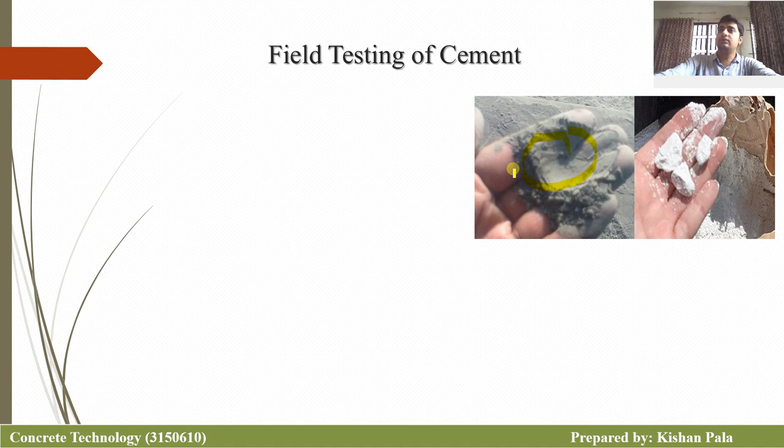So the first step is to identify the color of the cement. You can see in the first picture, you have to identify the color of the cement. It should be a greenish gray color. Second step, the cement should be free from lumps. So you can see in the second picture, the white cement has lumps.

And the third step is when the hand is inserted in your cement bag, it should give a cool feeling. It means if you are inserting your hand in your cement bag, you should get a cool feeling. This is the indication of fresh cement. Take a pinch of the cement and feel it between the fingers. It should be a smooth feeling and not a gritty feeling. So this is the indication of fresh cement.

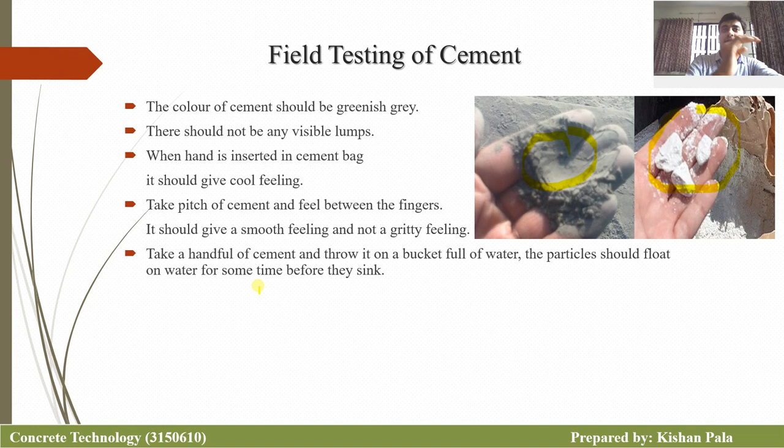Take a handful of cement and throw it in a bucket full of water. The particles should float on the water for some time before they sink. So this is also the indication of fresh cement. And you can test this at your field for the cement.

Take 100 grams of cement and add some water to make a stiff paste, and from the stiff paste make a cake, put it on a glass plate and slowly take it underwater in the bucket. The shape of the cake should not be disturbed while taking it down to the bottom of the bucket. After 24 hours, the cake should retain its original shape.

Remember that after 24 hours, the cake should retain its original shape. And at that time, it should also set and gain some strength. This is the indication of fresh cement. So these are the few steps you can apply at your site for field testing of cement.

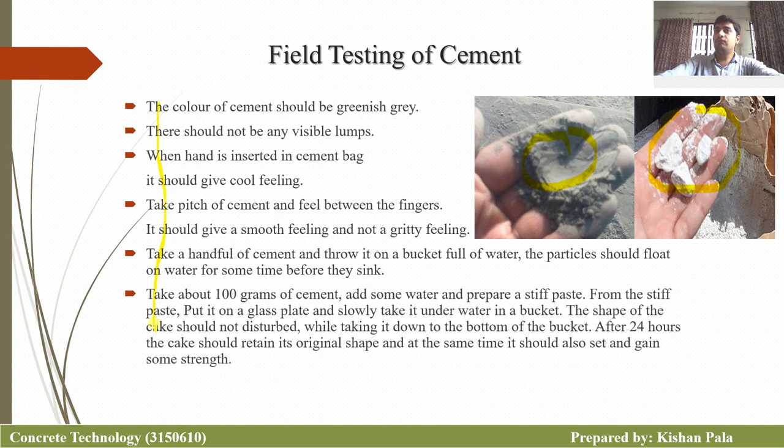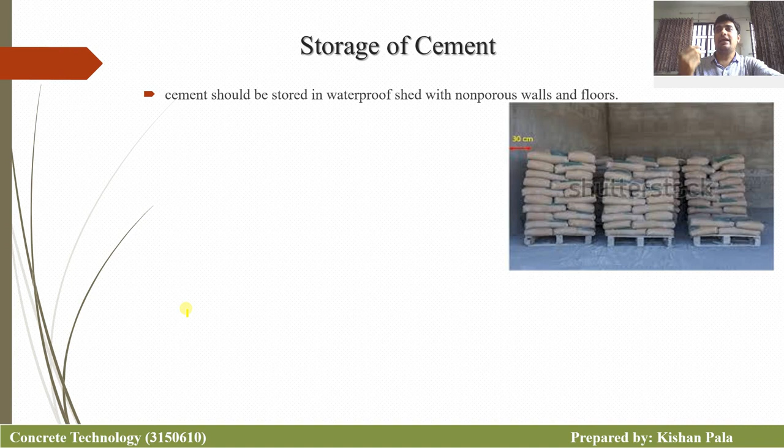Next, storage of cement. This is also an important point. You should be careful about storing cement. First, the cement should be stored in a waterproof shed with non-porous walls and floors. Second, the plinth level should be above the ground level. You can see in the photo, the cement is placed above the ground level.

Third, the number of openings and doors should be minimum in your storage room. You can see in this photo, there is no ventilation or windows in this storage room. Drainage should be provided if necessary. Next, cement bags should be kept 30 centimeters away from the wall.

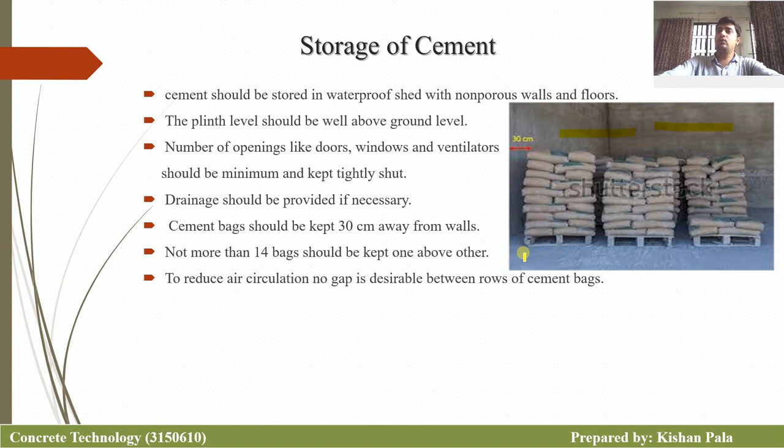No more than 14 bags should be kept one above the other. It means if you are placing the cement in one column, there should not be more than 14 bags in one column. Next, to reduce air circulation, no gap is desirable between the rows of cement bags. In a moist area, the cement bags should be placed on wooden planks kept above the floor or ground level. And old bags should be used first.

Remember, first in, first out. It means old cement bags should be used first. So remember this: first in, first out. It means old bags should be used first. And particularly for beam and slab casting, use fresh bags only. Once the cement has been properly stored, it should not be disturbed until it is to be used. So these are the points you should keep in mind when storing cement.

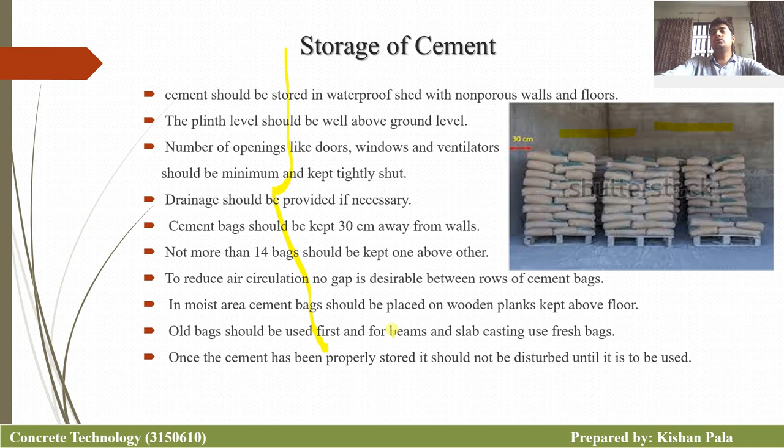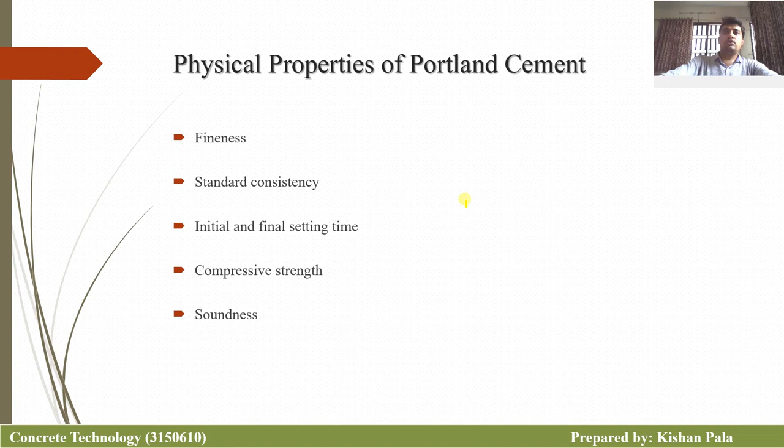Physical properties of Portland cement. There are a few tests you have to perform for finding the physical properties of cement. There are 5 tests. First is the fineness test. Second is standard consistency. Third is the initial and final setting time. Fourth and fifth, compressive strength and soundness of cement. So these are the 5 tests you should perform for finding the properties of cement.

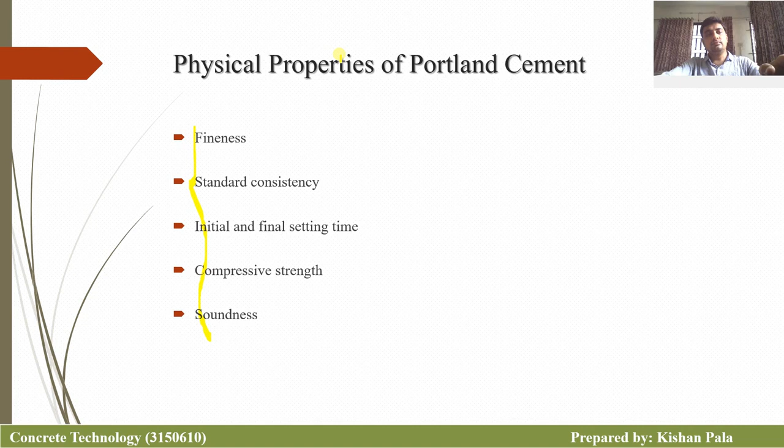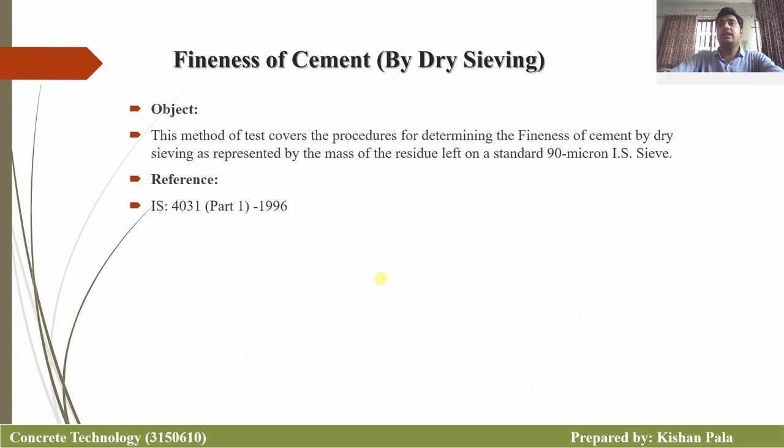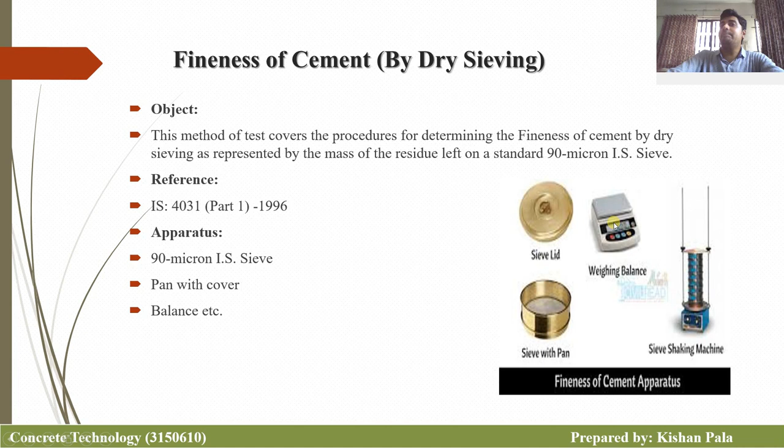Physical properties of cement: fineness of cement by dry sieving. Object: this method of test covers the procedure for determining the fineness of cement by dry sieving, as represented by the mass of residue left on the 90 micron IS sieve. You can refer to IS 4031 Part 1, 1996. The apparatus used for finding the fineness of cement are a 90 micron IS sieve with pan, a balance and a sieve shaker machine.

Let's understand the procedure for finding the fineness of the cement. You have to take accurately 100 grams of the cement and place it on a standard 90 micron IS sieve, and break down any air-set lumps in your sample, so remove them with your finger, and continuously sieve the sample in circular and vertical

motion for 15 minutes and weigh the residue left on the IS sieve. As per the Indian standard, it should not be more than 10% residue for ordinary Portland cement and it should not be more than 5% residue for rapid hardening cement.

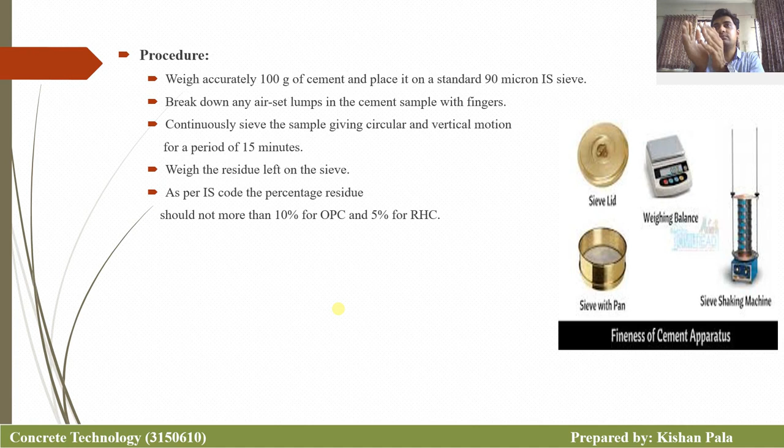I repeat this procedure once again. You have to take a 100 gram sample of the cement, put it on the 90 micron IS sieve, then shake it for 15 minutes in circular and vertical motion, and then take the residue on your IS sieve. It should not be more than 10% for ordinary Portland cement and 5% for rapid hardening cement. So this is the simple procedure. With this procedure you can get the fineness of the cement.

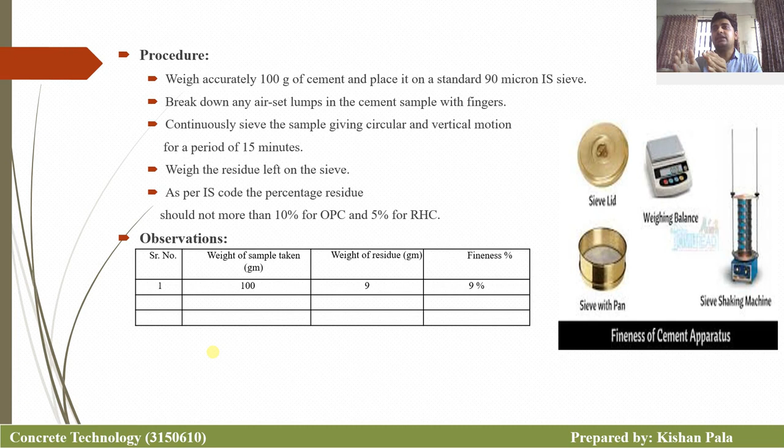For example, in the observation table, I have taken 100 grams of the cement and after 15 minutes of shaking, I got 9 grams of residue. It means 9 divided by 100 multiplied by 100, which is 9% fineness of the cement. If you have 100 grams of sample and after 15 minutes you get 8 grams of residue, it means 8 divided by 100 multiplied by 100, which is 8% fineness of the cement.

Remember that this value should not be greater than 10% for ordinary Portland cement and should not be greater than 5% for rapid hardening Portland cement. This is the simple procedure for finding the fineness of the cement.

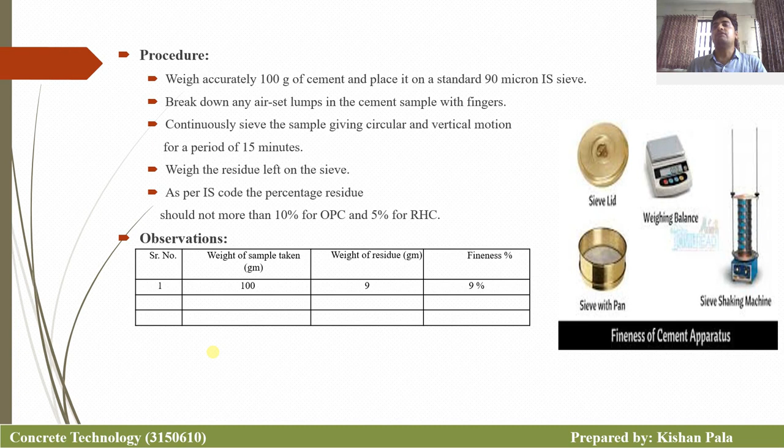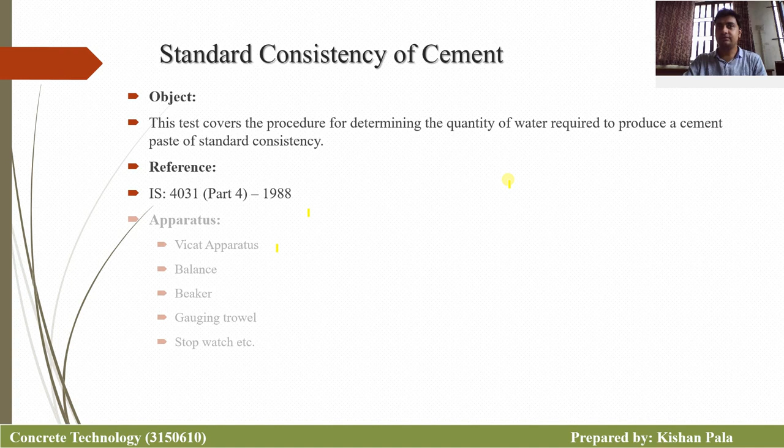Consistency of cement. Object: this test covers the procedure of determining the quantity of water required to produce a cement paste of standard consistency. You can refer to Indian Standard 4031 Part 4, 1988. The apparatus for finding the standard consistency of cement are the Vicat apparatus, balance, beakers, gauging trowel, and stopwatch. You can see them in the photo.

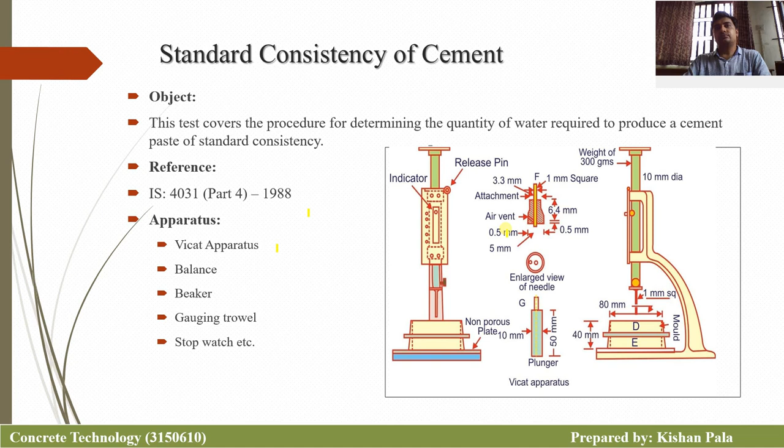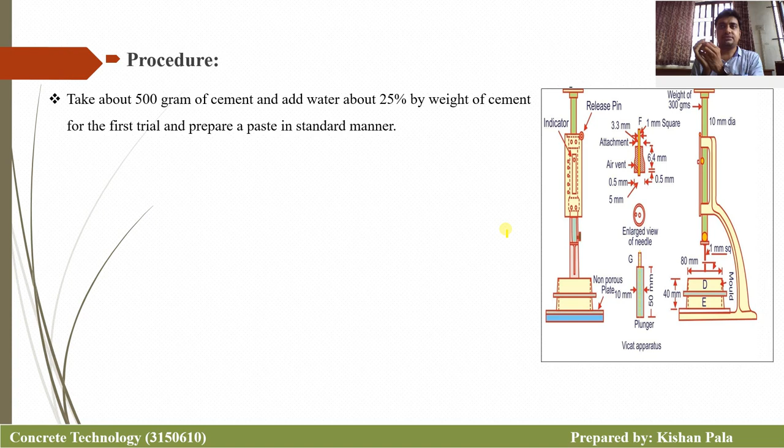Let's understand the procedure for finding the consistency of cement. First of all, take 500 grams of cement, add 25% water by weight of the cement mass, and prepare a cement paste. Then fill this cement paste into the Vicat mould. You can see in the picture, this is the Vicat mould. You have to fill the cement paste in this mould within 3 to 5 minutes. Remember that this procedure should be within 3 to 5 minutes.

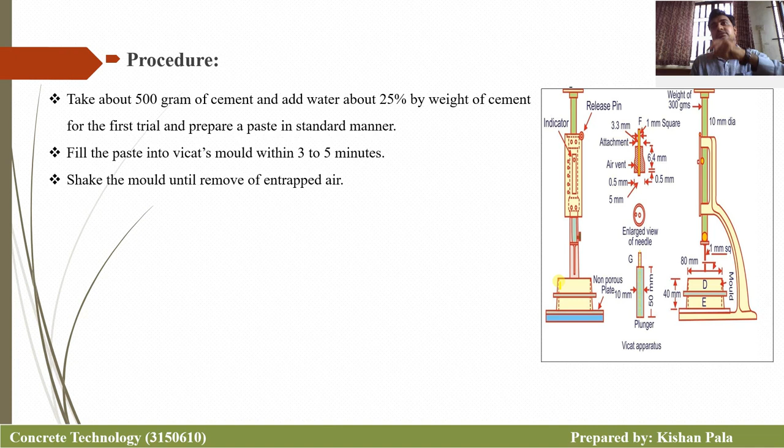The next step is to remove the entrapped air in your cement paste, so shake your mould until the entrapped air is removed. Next, use the standard plunger, whose diameter is 10 mm and length is 50 mm, attached at this particular point. Remember that this setup is for finding the consistency of the cement.

Release this pin and the plunger is allowed to sink into your prepared cement paste, and you will get the reading on this dial gauge. For example, from the bottom it starts at 0 mm, 1 mm, 2 mm, 5 mm, 20 mm, 25 mm. So you can get a reading from this dial gauge.

Remember that this is a trial and error method. You have to achieve the standard criteria for the reading, which is 5 to 7 mm as given in the Indian standard. So you have to achieve a reading between 5 and 7 mm. For example, if you are getting 0, 1, 2 or 3 mm, your paste has high liquidity, so you have to add cement mass.